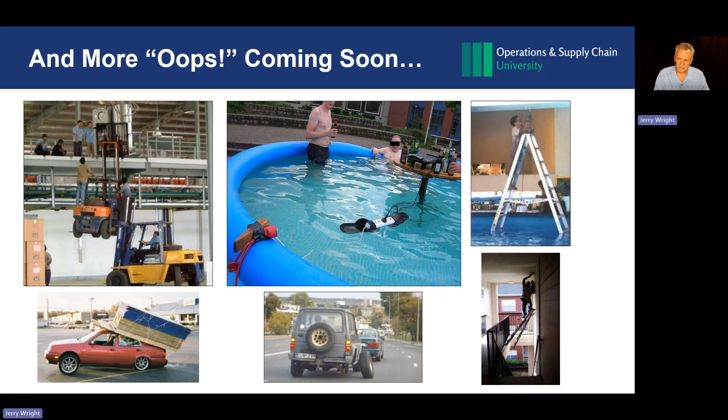One of my favorites on the upper right, you can see a gentleman's on an aluminum ladder in a swimming pool with a Sawzall or some kind of corded saw with the wire hanging in the pool. Of course, he has safety glasses on, but I'm not sure they prevent against electrocution. And you can see some other challenges down below. Again, these are mistakes about to happen.

So what causes mistakes or errors? Forgetfulness. We can forget steps of the work instruction when we're not concentrating on the task at hand. We could have a misunderstanding. We might jump to conclusions or not ask questions, and that can lead to inadequate training or making mistakes. Identification. Maybe we can't see the item very well or didn't take the time to properly identify it. We have amateurs. Think of temporary employees, new employees. They're just new to the job and they simply lack experience to know what to do.

We could have willful. Rules and work instructions are just ignored. Inadvertent absent-mindedness. So you didn't really know what happened. Oh, I guess I wasn't paying attention. Slowness. You could have delays in judgment, maybe even physical or medical issues that are causing a challenge. Lack of standards. Maybe we don't have good work instructions. They're either not available or just not used. Surprise errors and equipment malfunctions, a machine goes down, something like that. And then there's intentional, deliberate acts or sabotage.

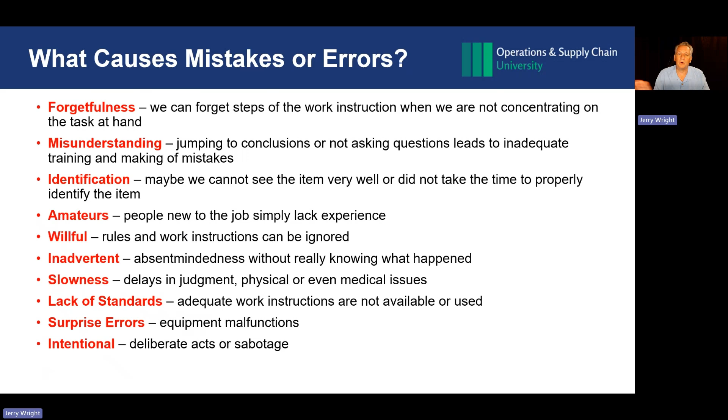Now, I say always, if you have someone who's doing willful and intentional mistakes and errors, you need to promote them to one of your competitors. You don't want them working at your business.

So how can we prevent mistakes? Errors are inevitable. There will always be mistakes because there will always be humans. It's just the way it is. So let's just focus on how we can prevent or detect them, because we're not going to be able to eliminate them completely. Any type of mistake that people can make can be reduced or even eliminated with Poka Yoke. Poka Yoke, we'll explain that in a second. It basically means error-proof or mistake-proof.

Now, the first thing is we employ 100% detection or inspection. We use inexpensive Poka Yoke devices or systems to automatically check for errors or defective conditions, and I'll show some examples. We can do a line stop where we pull the andon cord and say, okay, stop, we have an issue. And then before the trail goes cold, we can find out what's going on and get it fixed. And ideally, we don't resume operations until we correct it. Usually those kind of things can happen quickly. Sometimes they're a bigger deal. Then we also can have systems and controls like computer systems, barcode scanners, smart data entry, different things like that that can really help prevent problems.

So Poka Yoke or mistake proofing. Poka Yoke was developed by Dr. Shigeo Shingo. We just talked about him in setup reduction. He was one of the developers of the Toyota production system, and he really did this to help prevent errors and defects. So Dr. Shingo was really thinking about how things happen and how they can be improved. Now, it literally translates from Japanese to English as to avoid (yokeru) inadvertent errors (poka). So it also can really mean mistake proofing.

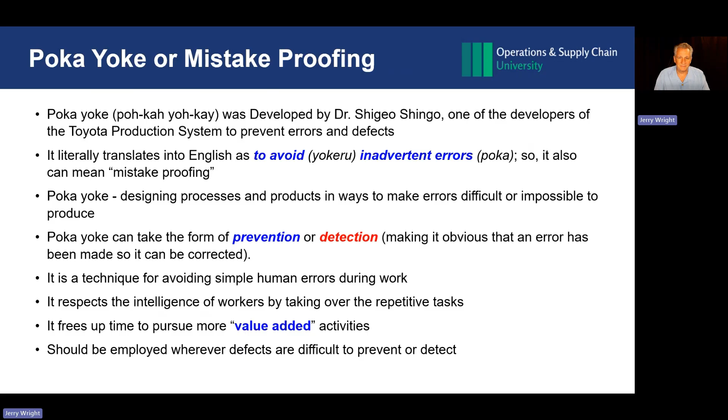As I said before, prevention, that's ideal. Make it impossible to cause a defect. And there's many ways to do this. We'll talk about some of those. Guide pins, limit switches, templates, scanners, data entry, shadow boards, torque tools, all kinds of things can be used to prevent problems in production or prevent errors.

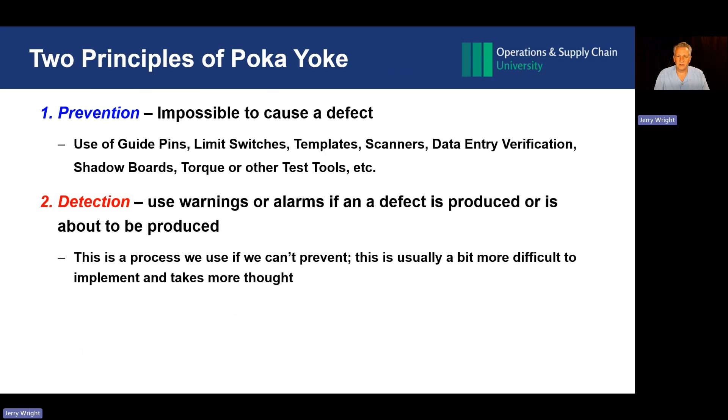Now, detection, not as ideal as prevention, but still good. We have some kind of warning or alarm if a defect is produced or about to be produced. Now, this is a process we use if we can't prevent. It's usually a bit more difficult to implement and takes more thought. So let's look at some Poka Yoke or mistake proofing examples. Here's a couple. I've got to go plug a grounded plug into an outlet.

I can only plug it in one way. Now, in order to put it in upside down or incorrect, I have to file down one of the blades. I have to cut off the grounding plug. That's the only way I could not do it correct. It takes a lot of effort. That's a willful intention, right?

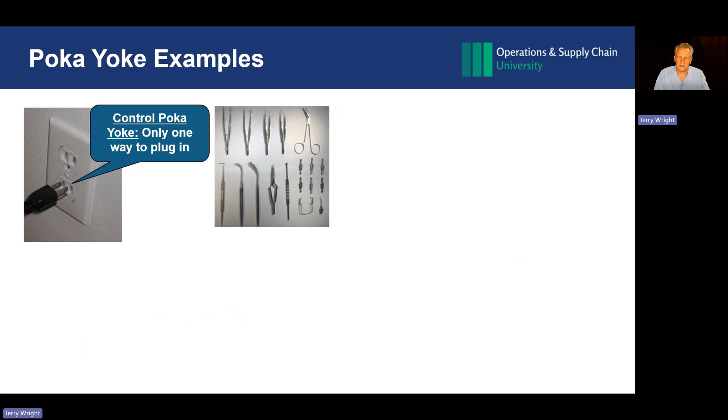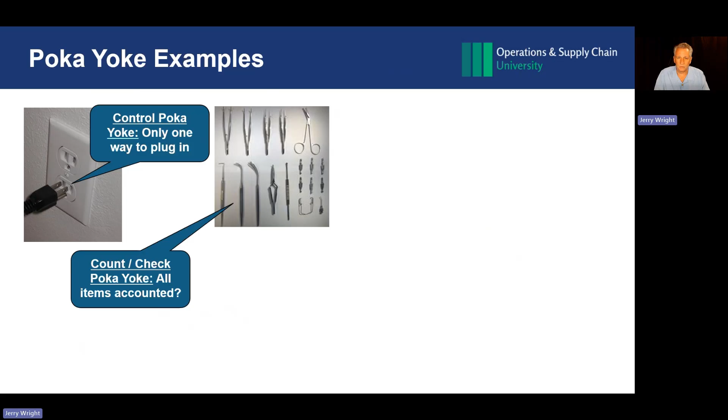Now, maybe I've got a surgery coming up. I have all the tools. I have them marked. I have a photo of them before, and then I check to make sure I have all of them afterwards because that's the right way to do it. I don't want this. That's a pair of forceps left inside a patient's body cavity. That's an uh-oh, we don't want that.

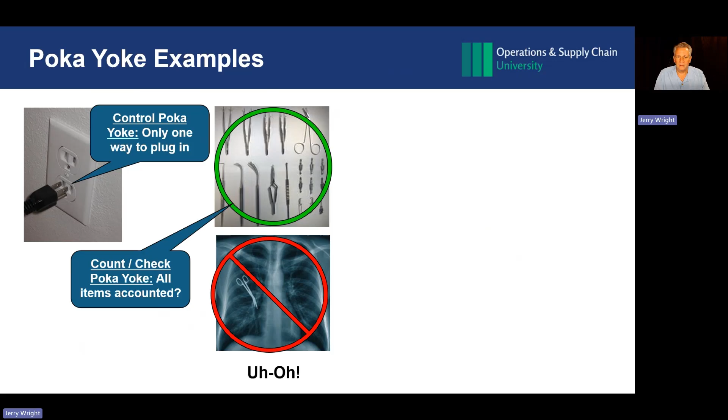Now, other forms of detection could be like a Cognex or other vision system that looks at the box of candy and says, are there 4 pieces in there? Yes, there are. Okay, if not, it alarms or it kicks it off or stops the line. Another one that's common that we've seen, and you may have seen in industry, is scales. As the box goes across the conveyor, it has a weight to it. It's pretty sensitive, and it says, "Oh, hey, it's too heavy or it's too light," and it either kicks it off or stops the line.

Now, an interesting story to share with you is I had a colleague who had one of these kind of scales in place, and every afternoon in the summertime, the scale would start failing, and they didn't understand why. What they realized after some problem solving, they did their 7-step problem solving, and they found out that they had a big overhead fan that was blowing air, and it blew enough air down and put enough pressure on the box that it made the scale think the box was too heavy. So they had to install basically like a cover or a deflector over the scale so that the air blowing down would go off to the sides and not affect the weight of the scale. So again, a great system.

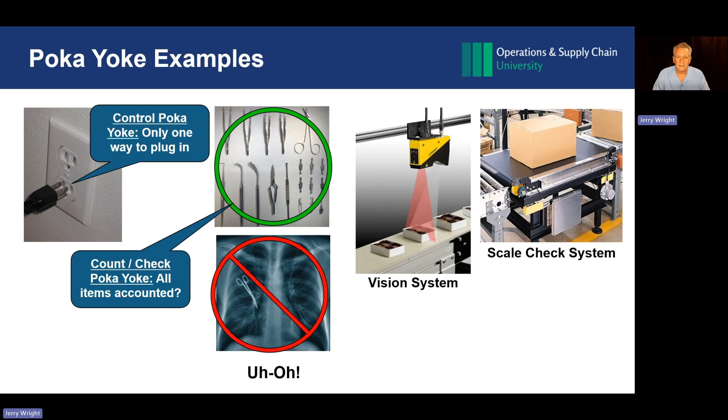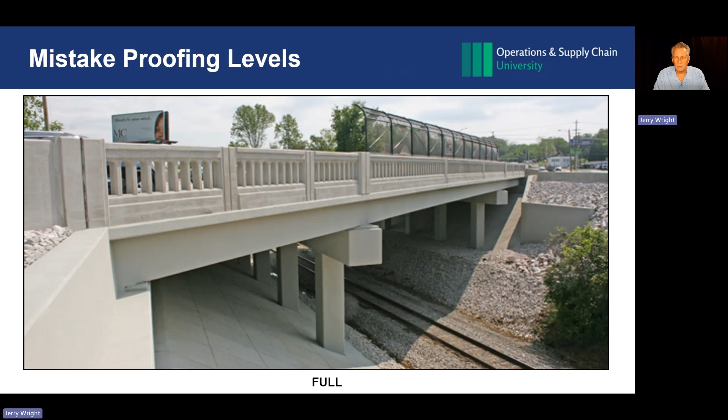Most people say, hey, we could put in a crossing system. Okay, that's better. That's more mistake proofing, but it's not full prevention. Why? Because people can drive around the arms. Sadly, trucks and other vehicles drive right through the arms and have hit trains. It's not what we want. To get full mistake proofing, we need to put in a bridge or an underpass. That's the best way to go. Now, we don't have bridges at every intersection of vehicles and trains because they're very expensive. A simple bridge like this could be millions of dollars. But that's the aim we want to have, is full mistake proofing.

That's a pretty hefty checklist to do mistake proofing, but that's the aim you want to have because mistake proofing is very powerful. It eliminates or prevents defects to a great degree and then detects those that we can't prevent. Fantastic and amazing tool. Highly recommend you look into it. So what's the approach you want to take? Here's the mistake proofing methodology.

First of all, calculate your first pass yield, or FPY. First pass yield is everything, say, in a production line that you shipped, divided by total products that you made that day plus rework plus scrap. Now you can imagine as rework and scrap go to 0, my first pass yield goes to 100. Do we ever get to 100? Maybe on an occasional shift or day or something here and there, but it's tough to get to 100. So what you do is you accurately track your rework and scrap, and then we can look at Pareto diagrams. So you can put a Pareto diagram together.